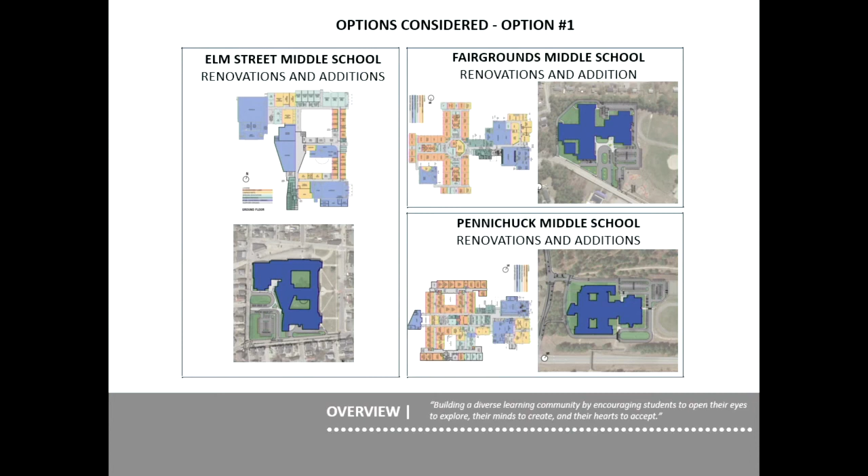deficiencies at Elm Street. The site itself, as an example, has no real opportunities for athletic fields. That was a really major one at the time. The school itself was built, as Alderman Dowd mentioned earlier, back in the 30s, so there were a lot of deficiencies in that side of the building that needed to be addressed.

So then the second option was we looked at a site in the southwest quadrant of Nashua, down near Cherrywood and Buck Meadow Road. There was an existing site there that was pointed out as a potential school site. So there were some investigations done there. And as you can see on the left there, the new middle school was proposed to be there. That was ultimately chosen by the JSSBC as the site and option to go forward with.

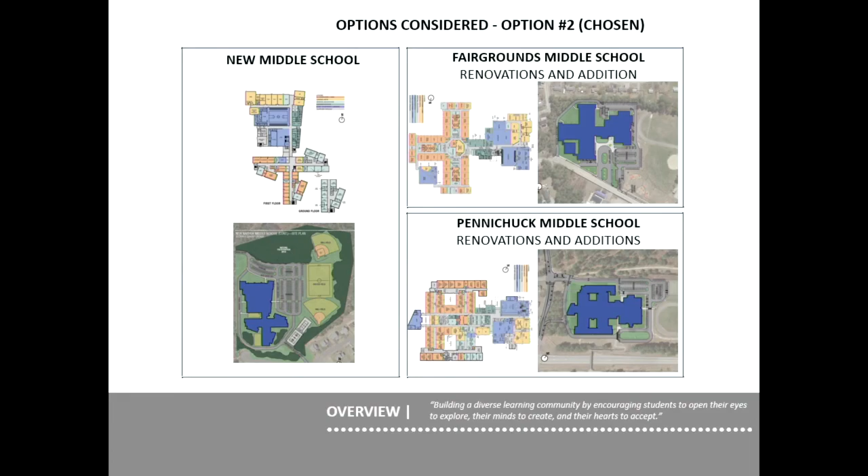If I could interject one thing, when we did the analysis on Elm Street, to renovate that was going to cost over $20 million more than building a new school. And when we were done, it still wouldn't meet any of the objectives of the middle school program. Yes, thank you. It was actually designed originally as a high school, not a junior high school or a middle school. So it'd be a challenge to make that particular school into a middle school, which the other two schools already were designed to be.

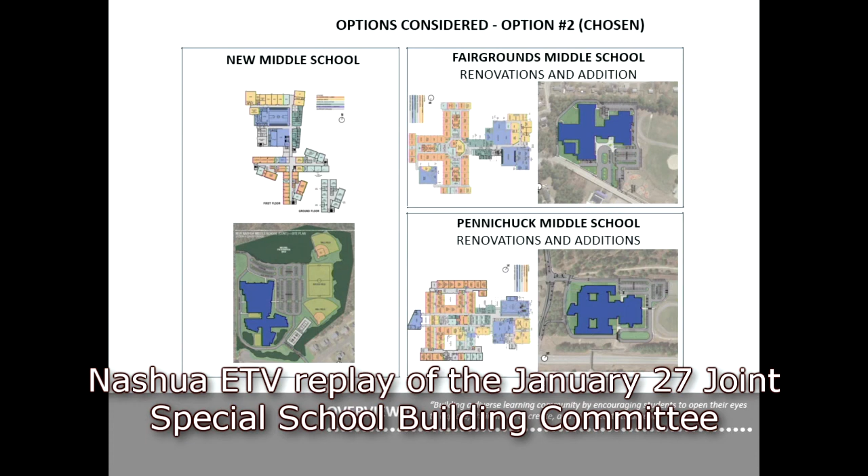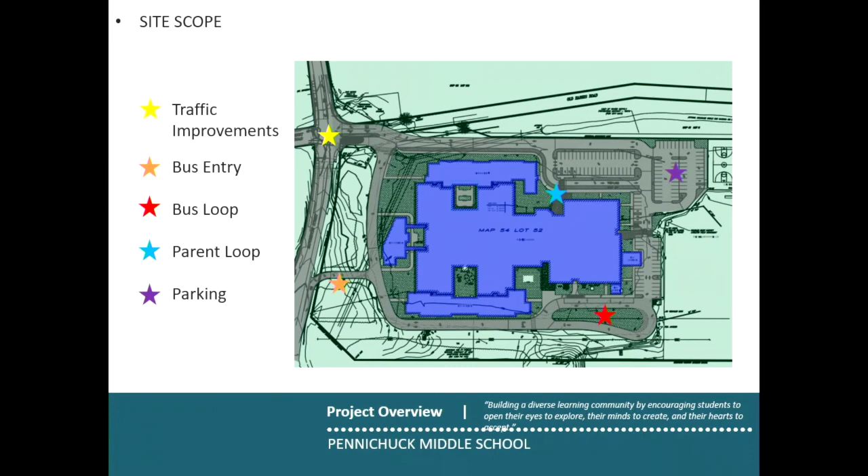There's some additional work, a little bit of widening, a turn lane being added coming onto the site. There's also a new bus entry, which is also intended as an emergency access drive. Initially there was only this one entrance into the school. There was no other entry. So a new bus entry is added and being used. The buses can come from the south and come right onto the property, and they come around this new bus loop. There was a bus loop here, but it's been renovated.

In addition, emergency vehicles can utilize that access, so there's not only one access point to the site. So like I mentioned before, new bus loop, buses from the north come onto the property and come down this loop, and this is a dedicated bus loop. Parent drop-off comes through here. There's a queuing lane all the way down the front here. They drop off here at the blue star, and then they can loop out and go back out.

There is an on-site traffic signal here. Again, there's a temporary one right now, but there will be a new one with the final traffic designs that helps regulate some of the traffic that would occur at this intersection on the site. Just one other thing, Jamie.

This is Old Harris Road. We have moved the entrance from up here further back, and it's basically only a road now that services Pennichuck's new solar field. There used to be house lots out there; they bought them all.

And in this area here, they're moving Pennichuck's fence back, and there's 8 or 10 new utility poles there because they have 4 acres of solar panels, and all that electricity is coming back into the grid. The other thing is before we can widen the street, there's a gas main here, a gas vault, and it's being moved onto Pennichuck land, and we have had legal do all the necessary easements.

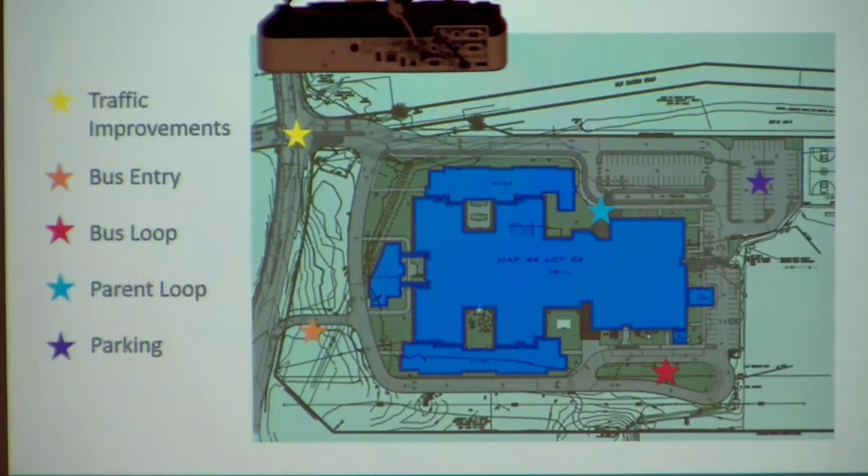All right, next slide shows the additions and the renovated areas. So you can see the green areas of the new additions. The north and south additions are classroom additions. They will not only house the additional students that would come from that split of the 1,200 students over at Elm Street School, but also there were 2 modulars on site that house students, and I think they've both been pulled away at this point.

There's still one, correct? Yeah, there's still one. One of them has been pulled away for the construction work. Eventually, they both will be gone, and the students will be housed in the school. Big security there, because before they're going outside, and so that really helps that feature. And the modulars were aging out.

The Learning Commons to the left you see there, that is the new library Learning Commons area. There's a music and chorus addition off to the right of your screen, and then a boiler addition with new boilers that have gone in and are running in the bottom right corner of the school. The Learning Commons is being displaced from the existing one in the middle of the school, with renovations ongoing. All these blue areas are significantly impacted under renovations. There are some other pieces being touched in some of the gray areas, but not widespread.

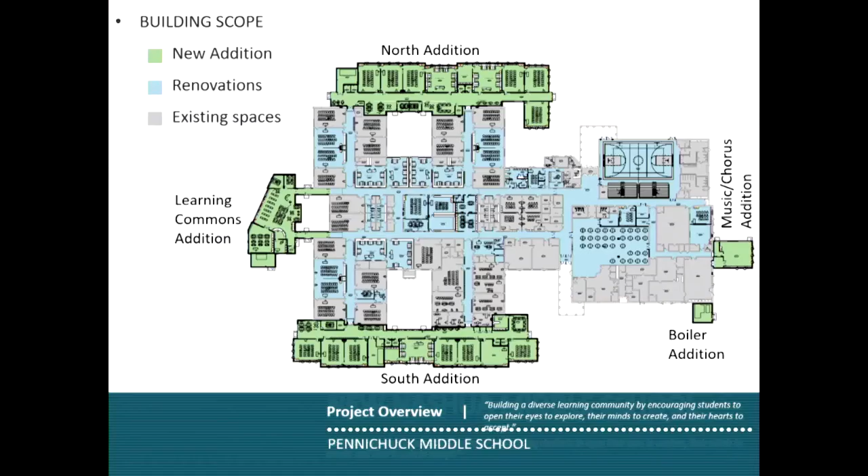The additions, I know all the additions have at least been started or are very far along, except for the Learning Commons. That'll come next year, or the end of this year, I guess. Spring, I'm told. Bring it. All right, anything on Pennichuck anybody has a question about? I know this is very cursory and high level, but I wanted to make sure I presented it.

I was just wondering where the entrance is to the school, the main entrance. Sure. So the existing main entrance is right here. So the intersection was over here. You drove in the parent loop, and it comes down, and the main entrance is here. There's also a secondary entrance at this school, which exists already, but that's where the bus students would come into this back entry right here. Anybody else? Yeah, we're gonna be doing some work on the entry area as well, with some new concrete, because it's in bad shape.

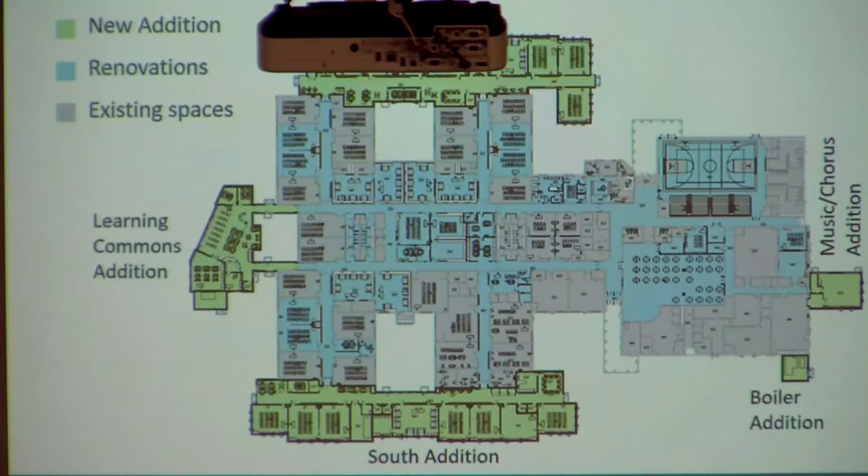I do have one question. Are they going to add solar panels too? This is not part of Harriman's scope necessarily. We've been working together with Revision Energy, who is the selected vendor for that. But yes, the Fairgrounds got solar across the entire roof. Pennichuck is also getting it, and the new middle school, I believe, is also slated for that. Yeah, Revision Energy, we sort of got ahead of the game in Fairgrounds with Revision, and we had to move some of the panels after they were put in, so we're not doing the solar panels on Pennichuck till we're done. Oh, okay.

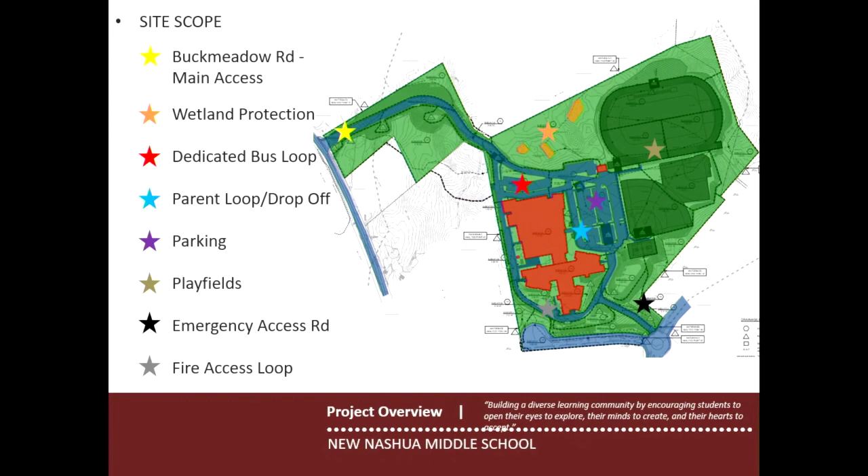All right. Moving to the new Nashua Middle School. Again, the school site is down off Buckmeadow Road, which is right here, noted by the yellow star. That's the main entry to the school. And then Cherrywood is just a little snippet here, and this is Medallion Court down this direction. So it's kind of in that corner there. The original site, as it was started, was in this little green here. There were some additional land purchases, particularly this one, and then there's a little sliver here that occurred over the course of the design. So again, Buckmeadow is here.

The main entrance will come up onto the site. The bus loop is right here where the red star is. They'll be dropping off here, and then they'll be entering this entrance here, and we'll look at the school itself in a moment. The parent loop will come down. It goes down to this blue star here. That is the main entrance to the school where the secure vestibule is located. There's an assortment of parking lot parts and pieces inside of here, noted by the purple star. There's a facility building right here that houses athletics and building maintenance storage.

In the orange area is a wetland protection area. There are some vernal pools in that area and some wetlands that are being kept back from so they can stay intact exactly as they are. So that's noted right here on the north side of the site. And we're partnering with the Conservation Commission, and they're in total, full agreement on the project. Yep, there were meetings with them, and we made some alterations to the site layout to make sure that we met some of their desired intents on that, so it was a really, really nice process.

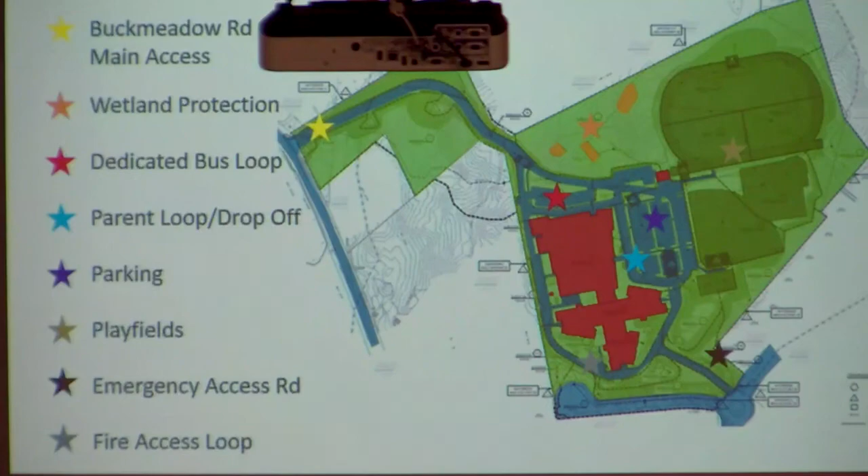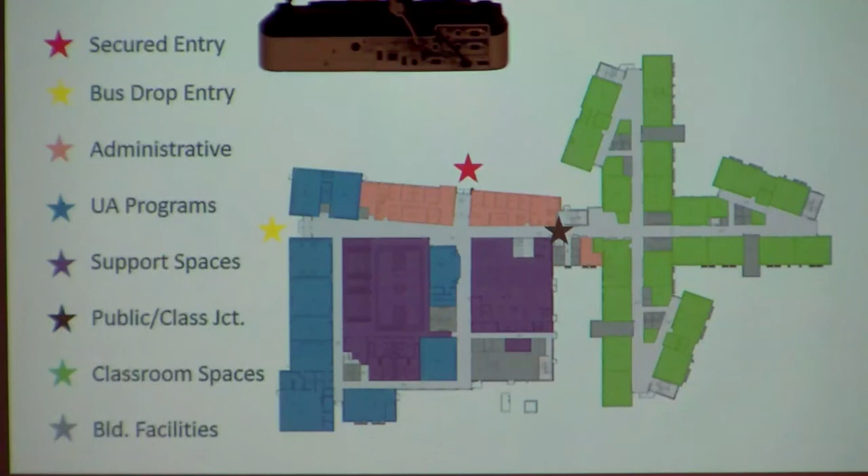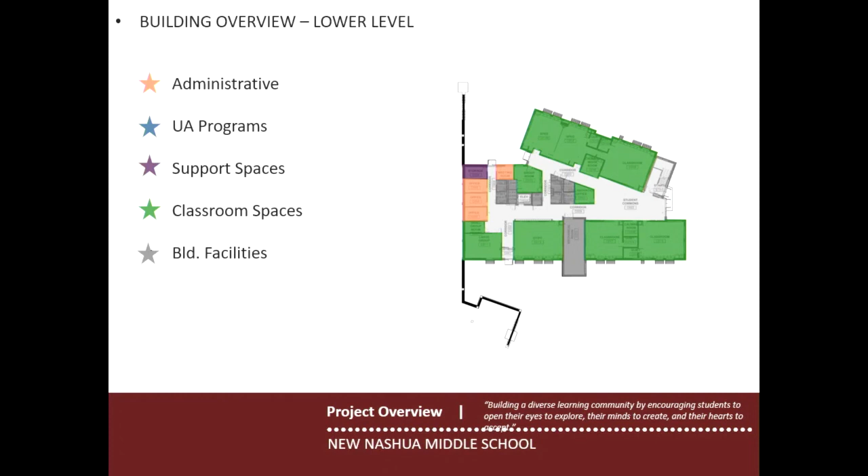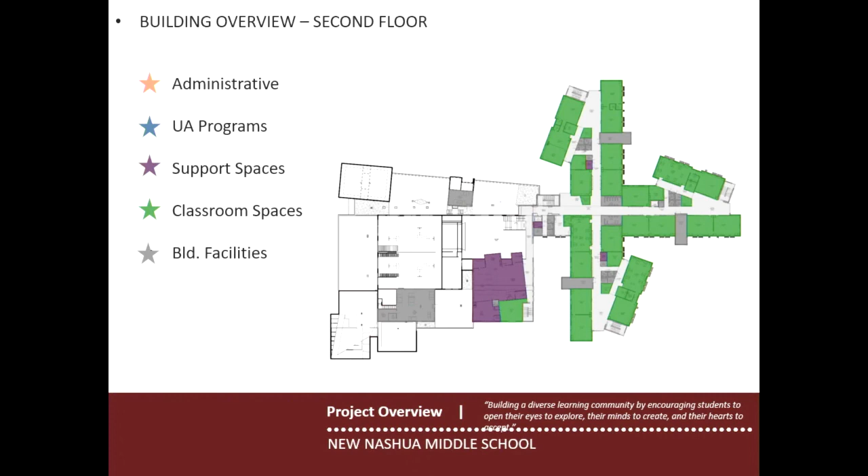Going up to the second floor, all this white area really becomes either the view from the floor below or roof areas. So there's no space necessarily that people would be in these white areas. There are some mechanical spaces. You can see there's some right here, and then right here there's some mechanical rooms.

But generally, you come up the community stair or the elevator, and you have a corridor down to the learning commons, which is right here. There's a computer room here. Or you go to the classroom wings that have, again, the assortment of spaces for classrooms. And if you go up one more floor, you've got just the classrooms, really. This is all roof over here, so this is just the classroom wings.

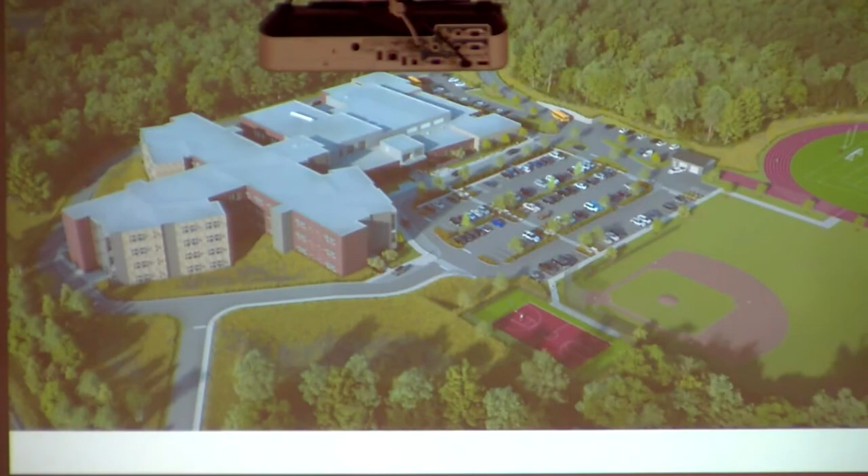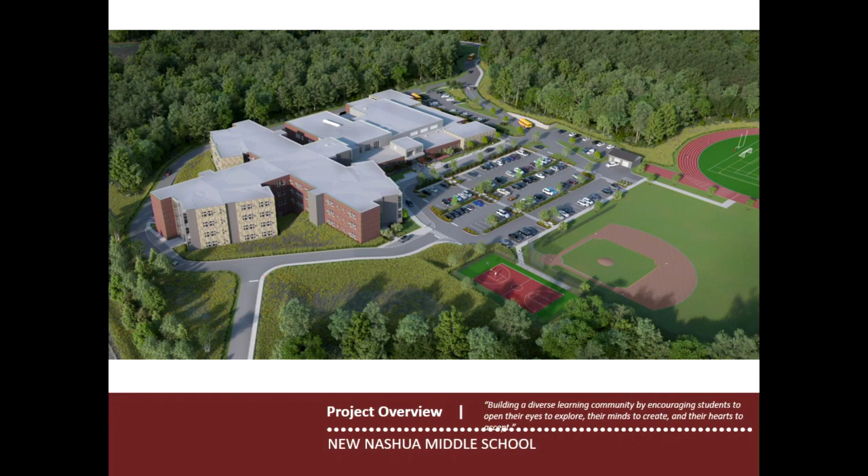So here is a rendering of what the school is intended to look like. If you had a nice clean visualization of what that looks like, it's gonna look almost identical to this when it's completed. So you could see there's the view up to Buckmeadow going that way. This is the main entry to the school. The bus loop is here. The main entry is coming through here and dropping off to the main entrance right there.

You could see the classroom wings over here, and you can kind of see that lower level. There's 4 levels here, but only 3 levels here. So you can see that drop off. This is coming down toward Cherrywood. You've got the athletic fields we talked about over off to the right. Little maintenance building right there I was talking about.

This is new for people that were on the board before. We worked on this over the past month or so. I don't remember seeing this. It's nice. Much more visualization.

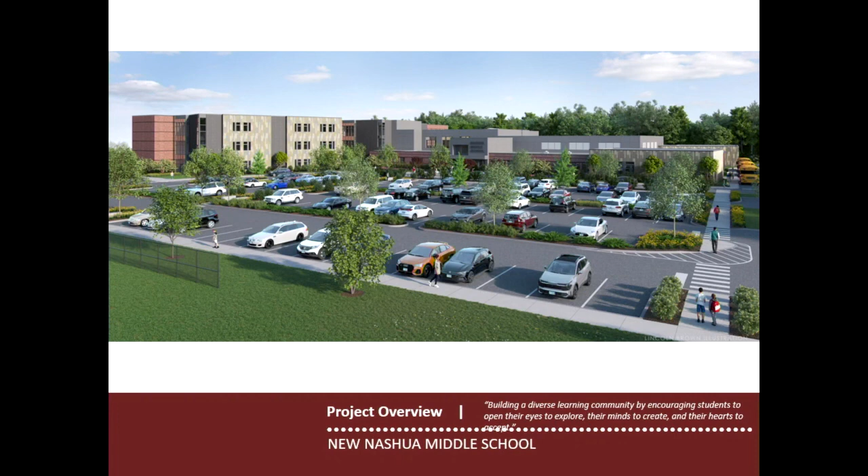Okay, then, so if you walk into the main entry, you go through that secure vestibule I was talking about earlier, and you walk into the school, you're allowed to go in. You're going to see the cafeteria and the performance stage when you first walk in, and this is what you're going to see. So you can see the kitchen serving lines will be behind these doors here. Up above, you're seeing the learning commons. There are some breakout rooms, or this particular one here I'm pointing at is a reading area inside the library.

Almost like a sports box where you're looking down over the cafeteria, but you also can see the stage from here. And I think my next view, you'll actually be looking back at the stage from up on top of the community stair off to the left. So if you walk up those community stairs and you turn around, you're looking back to where we were standing down here, but there's your performance stage. And then again, those box seats over here.

I often got questions about the sound of the cafeteria into the library area. This wood texture here that you're seeing is actually an acoustic treatment. It's called Rulon. It's an acoustic siding that helps keep the sound deadened inside that space. But also the glass that's here is insulated glass. The walls have a high STC, sound transmission class, to help buffer that. So very good rating on this wall here.

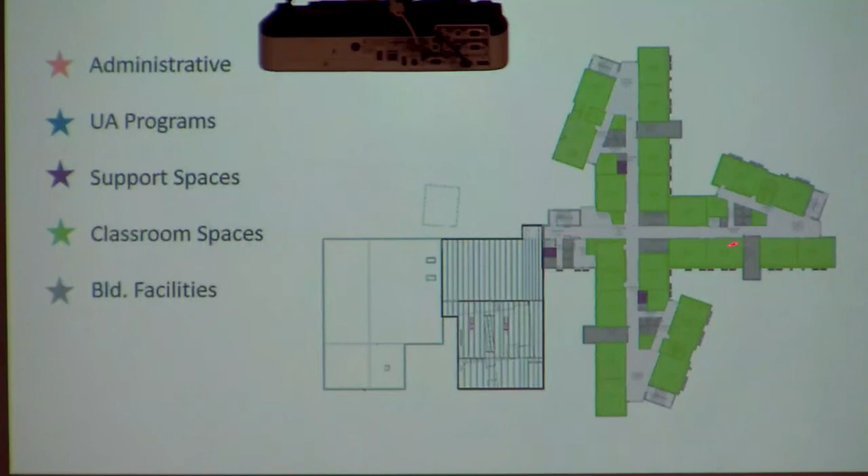This is you walk all the way down, you go through the separation between the public area and the classroom side. You go all the way down to the end, and I actually like to point where we're going. So if you're coming all the way down and you went to one of these wings, you're standing right here looking into this collaboration area in this next slide. So now you're looking at the glass at the end. Students are collaborating inside of this space.

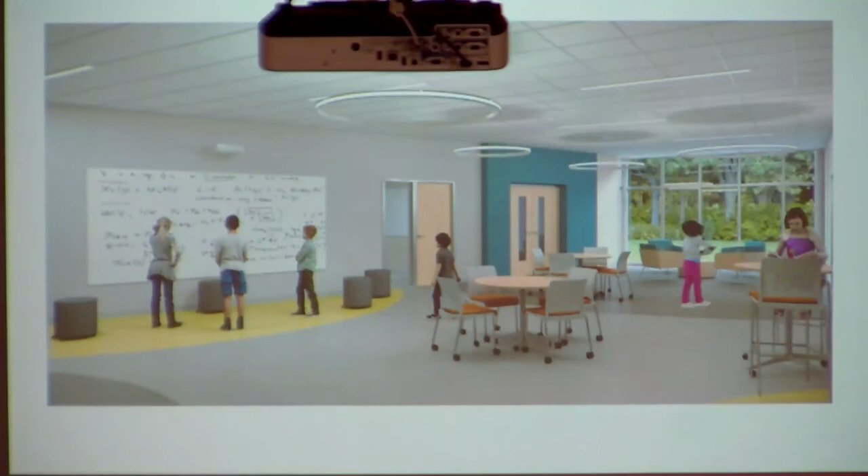This is a stairwell going down to all the floors right here, one of them. There's a classroom to the left, there's classrooms to the right. Where this student is sitting here, there would be a TV like we had at Fairgrounds, I mentioned earlier, where the fireplace is going, you know, that sort of thing.

And if you walk a little bit further and you turn around, you're looking back down the corridor you just came, but there's also these community little groups like we had mentioned again at Fairgrounds where students can go and work with teachers, or teachers can work together and collaborate, and kind of have more of maybe a project-based meeting inside of these.

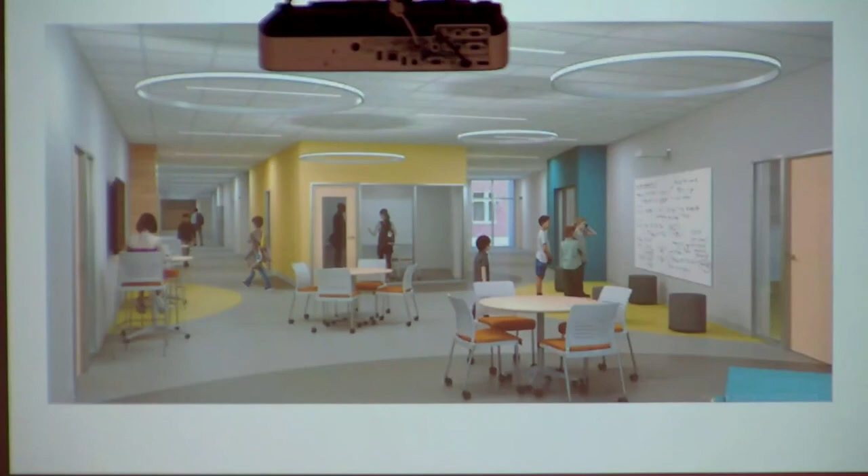All right, any questions on the new middle school? Questions? Alderman Klee? Thank you, Mr. Chairman. Refresh my memory, these glass walls and so on, can you see in from the outside of those? Are you talking these ones right here? No, if you go to the one you were showing with... Right here? This one here, yes, that one there. Yeah, mostly yes, you can.

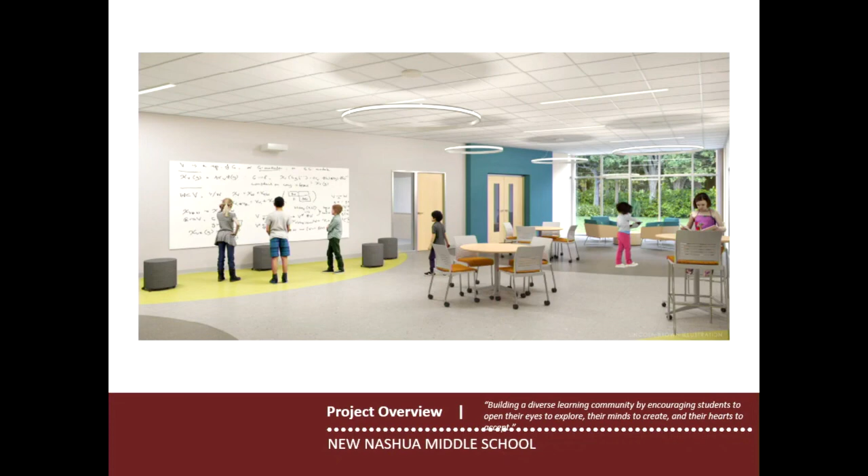The glass is treated with a low E. It helps with the glare coming off it, so it will actually give you an appearance that it's not totally transmitting visually through that.

But yes, you can see through them. May I follow up, Mr. Chairman? Follow up? Yes. The only reason I'm asking is I was just recently at St. Joseph Hospital, and I noticed when I walked into the entranceway, they have all this glass that you can see out from inside, but you can't see in. And where we continue to think of the safety of the children, I didn't know if we had thought about

anything like that, or... Yeah, those discussions can go really deep. There's kind of two sides to that, and I would defer some of this conversation to Nashua's safety and security director, but being able to see in and out is also sometimes as important as not seeing some spaces. So I think police and fire prefer that they can see in. Okay, thank you. That answers my question. Okay. Thank you.

Chairman. Gloria? Okay, it's just a comment. The futuristics of those lights, are they lights or what are they? They're lights. They're great. Okay. They're kind of like LED. LEDs, yeah, lights in the building are LEDs. Oh, okay. Yep. The entire building will be energy efficient.

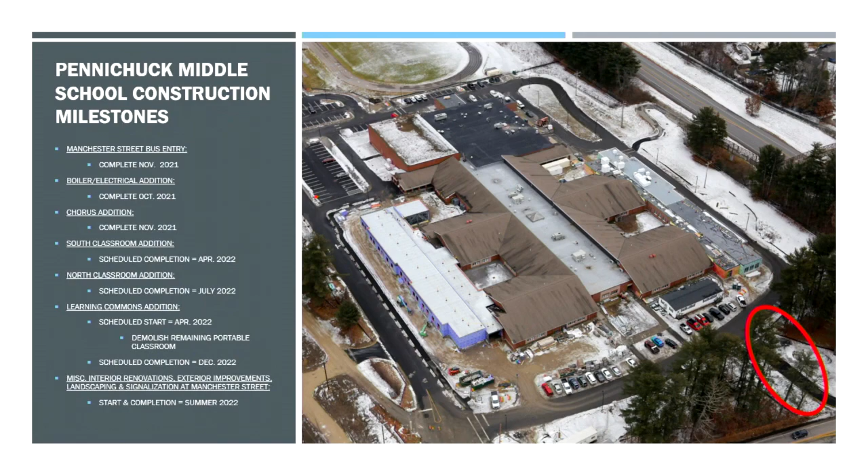Manchester Street, that's the new bus entry off of Manchester Street here. That's been completed and temporary paved. We'll be completing the final tie-in this summer when school lets out. So that'll be all wrapped up by the time school gets in next September.

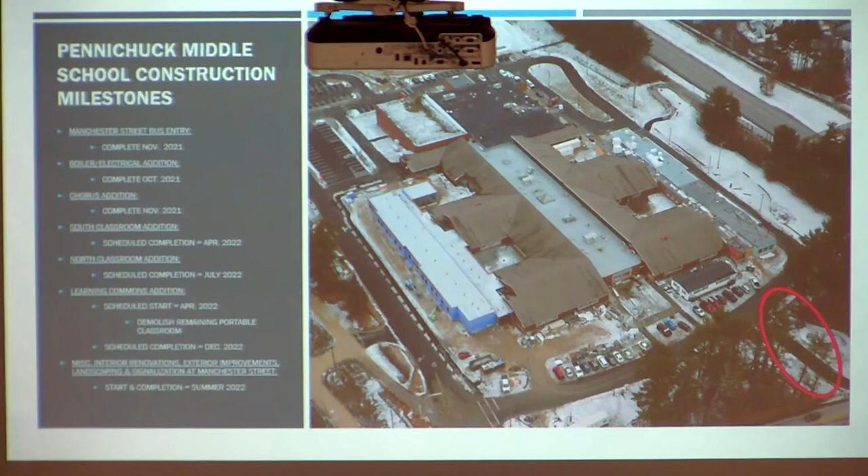Moving along, back from this view, that's the boiler room addition that was completed in October. I'll get into the details for each of these additions. I just want to kind of show everybody where each of them are situated on the site. The next is the chorus addition that was completed in November 2021. The students have since moved out of the old chorus space and into the new. Again, I'll show some photos of the completed areas as we go through here in more detail.

Next is the south classroom addition, just along the new bus loop. That's moving along very well. We actually started painting this week, so hopefully maybe we'll be able to do some tours coming up and you'll be able to see the progress that's been made.

North classroom addition, we're loaded. We got all the roofing material arrived on site today, which is a good sign. So we'll get that just in time for the snow. So I'll be showing some progress photos there, and you'll be able to see the progress on the north addition as well.

And the learning commons, Jamie mentioned, you can see that there is one remaining modular classroom there that is demolished during school vacation in April. The one just to the north that Carl was pointing to was demolished last summer. Once the modular is demolished, those two teachers will move into the brand new classrooms for a permanent home in the south addition, and then we'll be able to start construction of the new learning commons that Jamie showed you earlier. That's scheduled to be complete at the end of December of this year.

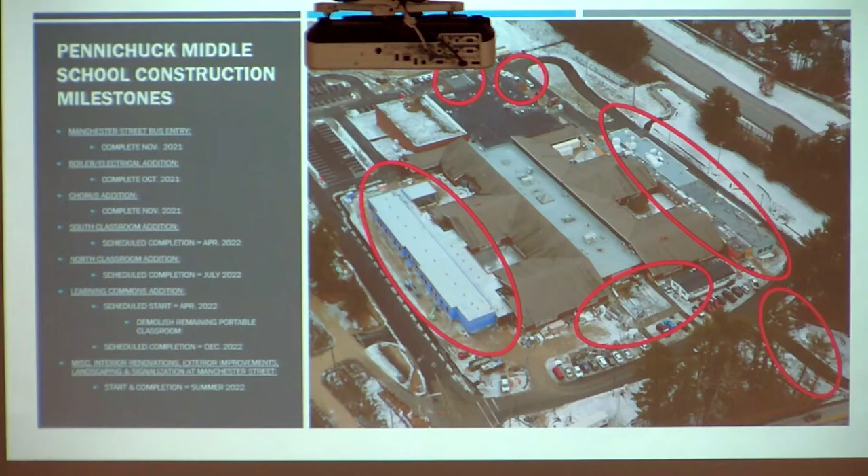So overall, we're a little over halfway complete in the construction process. We broke ground in the site improvements March 2021, and as I just stated, we'll be wrapping up at the end of this year. Next summer will be all the various site improvements, all the final plantings, landscaping, all the final signalization, the final lights that you were just mentioning before. That'll all take place this summer, and we'll be ready at the end of the summer when the students return.

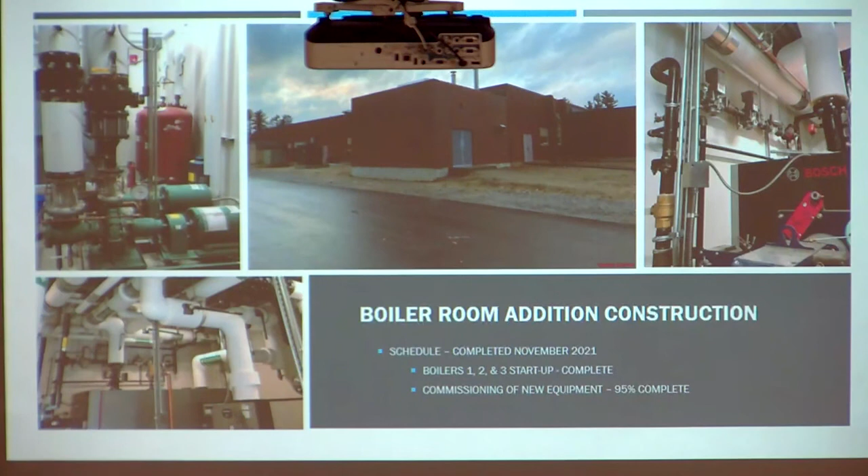So getting into the additions in more detail. So this is the new boiler room. This was completed in November of 2021. It includes three brand new boilers. Boilers 1 and 2 are kind of the main life of the building, and boiler 3 is a condensing boiler, which is kind of like an autopilot boiler used in the warmer months, so we don't have to run those. It's more of an energy efficient system as part of Harriman's design.

Commissioning of the new equipment is about 95% complete. Given that we aren't done renovating the existing building, we're kind of chasing temperatures around the building, making sure that students and teachers are comfortable during the day.

Punch list is basically Harriman and Harvey will go through the space and generate a list of items that make sure that we built it to meet the specifications of the project. And then we issue that to our subcontractors and make sure that the space is turned over as it should be. That's all been completed for this area.

And as I stated earlier, they moved out of their original space, and now we're renovating the existing music and keyboard space, and that'll be turned into a health and a keyboard space. We'll be turning that over in about 2 or 3 weeks.

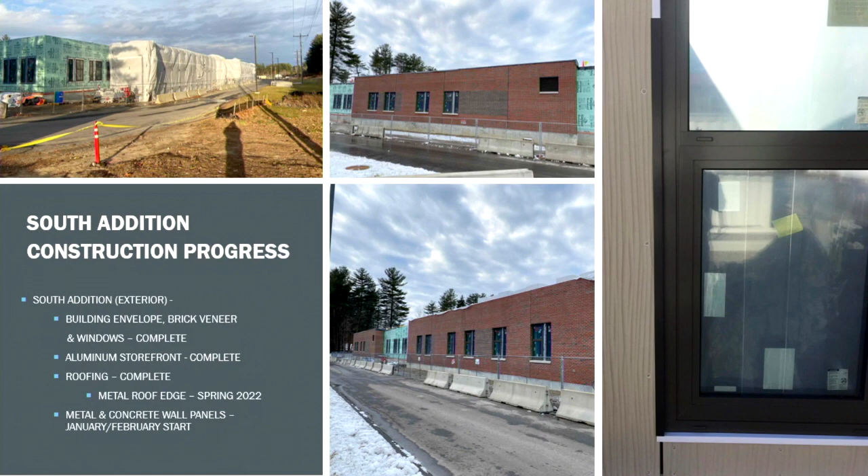So right here, you see this is kind of a zoomed in photo of what the concrete panel will look like. So with the operable windows, they're actually really nice windows, and my superintendent is very excited about them. So they don't get happy about much.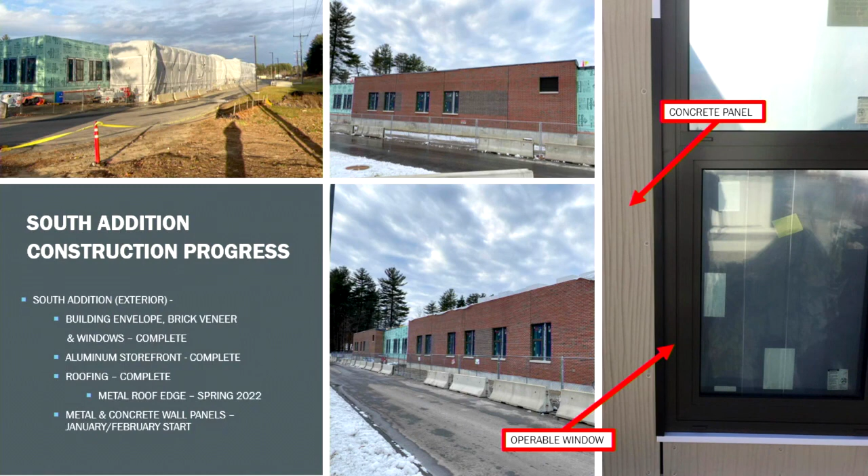So moving to the interior, I wish I had more updated photos. We've actually started painting this week, and ceiling grid is going in, so it's really starting to shape up in there. But all of the mechanical, electrical, plumbing, and fire protection in wall and above ceiling is complete. Now it's just kind of tweaking things and making sure that we're addressing all of the Harriman comments for their site visits. Drywall and finishing is all complete.

Priming and painting will be complete at the end of this week. Installation of all the fin tube radiation, that's all the heating elements underneath the windows, that is all complete as well. And as I just mentioned, the ceiling installation is in progress right now.

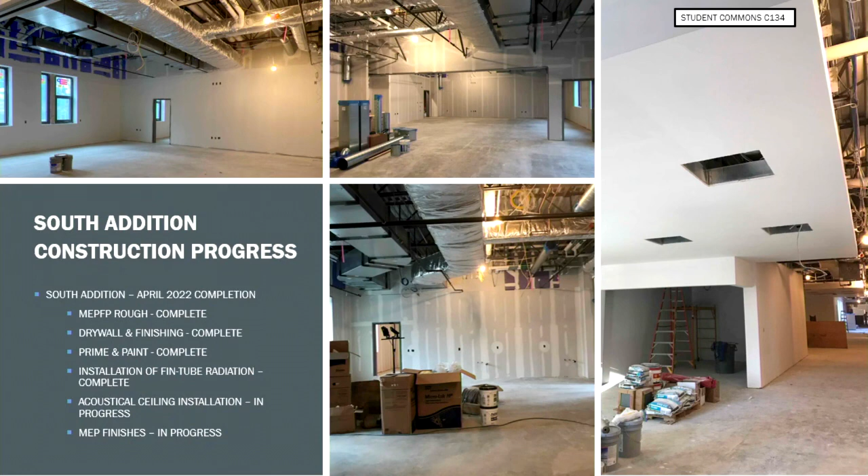So there's a view of one of the student commons that Jamie, so I guess you can see that's walking in from kind of like the bus loop area from Manchester Street. If you come through the aluminum entrance, that's going to be kind of a collaborative space for the students.

Jamie mentioned some renovations of the existing bathrooms. I just want to highlight that there are toilet partitions installed in these bathrooms. So again, when I took these photos, they weren't installed yet. They are installed now. We're going to be actually turning the first bathroom group over on Monday. So then we'll be taking over the second bathroom group in February, and it's about a 5-week turnover to get everything completed in there. But we're just working with Principal Falzerano and his staff to make sure that everything's done on time, and he's been great to work with.

Just an example of how we block off our construction areas in the school. We use hard partition doors and all the appropriate signage, so it's pretty obvious where we're working, and we just want to make sure that student safety is of the utmost importance when we're working in the school in these areas.

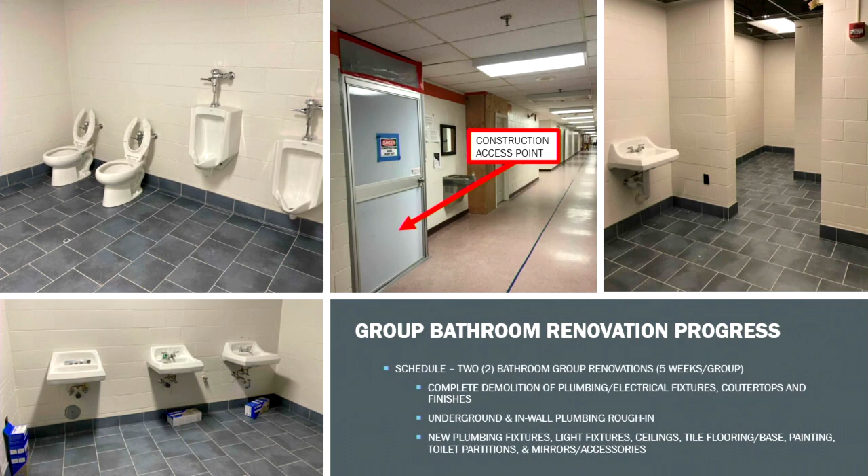So the renovations in here is complete demolition of pretty much everything in there. It's a complete facelift, all new toilets, all new countertops, toilet partitions, lavatories, everything, lighting. It's definitely a big change from what was in there before.

So those are courtyard areas. I believe in the north courtyard area, there's some concrete flat work going in there. There's some granite benches going in there, and various landscaping effects going in there as well. So it's going to be a usable space for the students and teachers in there. That'll all be performed in summer 2022.

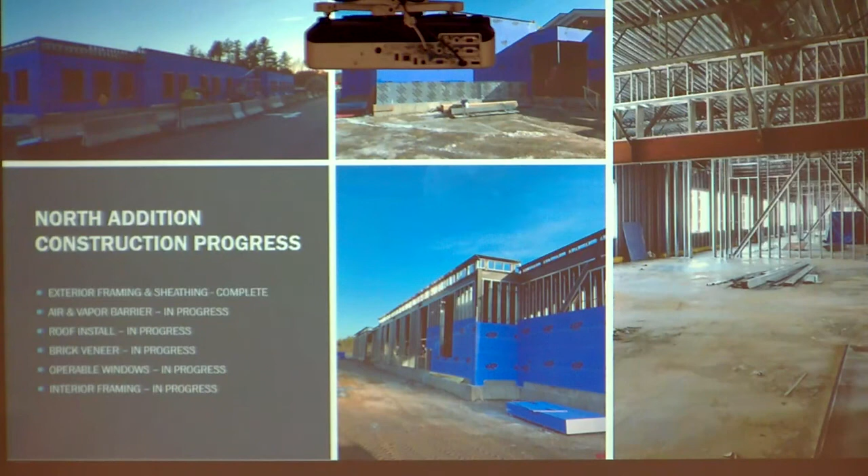Moving into the exterior kind of overview of what's going on. Again, much more has happened since these photos have been taken just 2 weeks ago. All the exterior framing and sheathing has now been complete. All the air and vapor barrier is in progress. That's kind of a temperature dependent construction activity. So with the cold temperatures, we have to build a tent around it and heat it to be able to do the work. So we're in the progress of doing that now.

We'll be setting up tents next week and it looks like we do have some warmer weather coming. So, right. Relatively. That's why we want to get the roof on so it doesn't rain inside. Relatively speaking, right, warmer weather. Happy superintendent, happy life.

The brick veneer will be in progress, as I mentioned. We'll be building the tents to allow us to continue to build the masonry in these cold temperatures. All the operable windows are in progress, and the interior framing is about 90% complete, as you can see it there. At the time of that, I couldn't find a clean area to take a photo here, but we're roughly 95% complete interior framing today. So we're moving along very well in the north addition, and I think you guys are going to be really happy with the results.

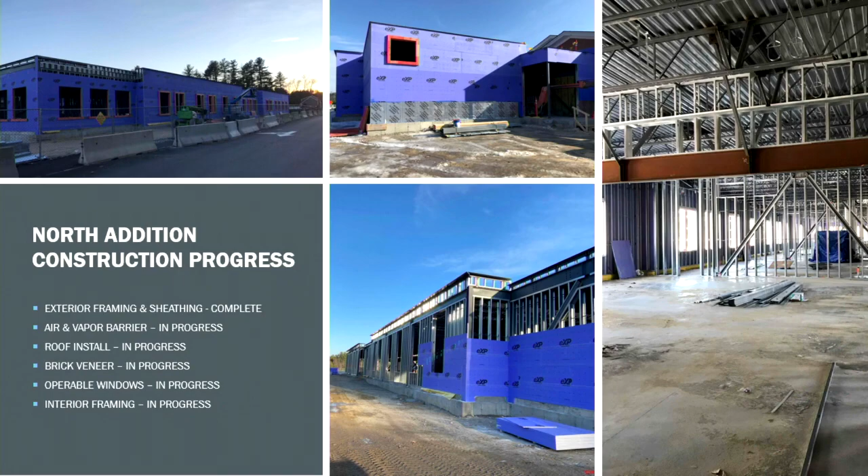Any questions on the Pennichuck construction progress? Ms. Timmons? Yes, I have one question. Is that a second level? Is that the classroom area? If you go back a slide? No, it's all single story for the new additions. Oh, it looked like it's 2 levels, but it's not, huh? Oh, okay. That's one question I have. Thank you. Any other questions for Harvey? Ken? Okay.

Let's go. So, you want to get into the PCO, PCCOs? Sure. So the next portion of the packet that I'll be bringing you guys through, I'll explain to the new committee members and kind of give a refresher for everybody else. So there are a few acronyms that we use in construction. There's a PCO, which is a potential change order, and this is generated whether it's from a question that we ask, whether something is unclear. Could be a client development thing. It could be a code official enforcement item. Those go to Harriman. They will issue a directive for Harvey to price.

We'll request pricing from all of our subcontractors. We'll review that internally, and then we'll package that into what's called a potential change order, and that's where we present that to this group. With approval from the group, then we can give our contractors permission to perform the work and go from there. Once we have a group of PCOs that are approved, I usually try to do it about once every month, we compile those approved potential change orders into what is called a PCCO, which is a prime contract change order. And that's just kind of a formal document that allows us to alter the overall contract value of the project, whether it's an increase or a decrease.

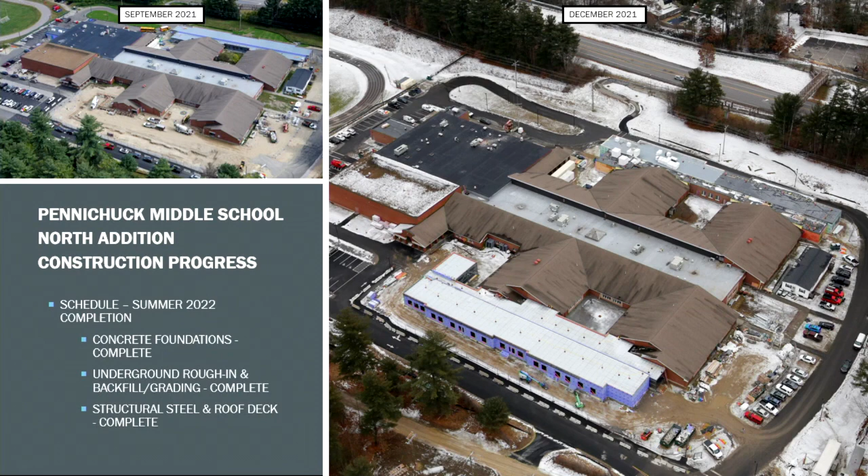The scope includes refinishing and painting of those existing metal stairs, so those stairs would get power washed and refinished and repainted. There is a deduct savings for the demolition of those stairs. The original design called for us to demolish those stairs. We've since discovered that those really aren't in bad shape, and they should be salvaged. So there's a credit for that work that won't be completed.

There is an added cost for all the site work prep for the new concrete flat work. That's all the sidewalks and the flat areas, granite curbing, etc. We're going to be adding new fencing and gates around that area to further secure it and kind of spruce up that area. It's going to match the tennis courts, the black vinyl fencing.

And the original design called for some specialty pavers in that area. So since we're going to be putting concrete in that area, we're not going to need to install those expensive pavers. So that is a savings there as well. With all of those adds and deducts, everything totals to a contract add of $22,623.97. Does anyone have any questions on the scope of work that was presented?